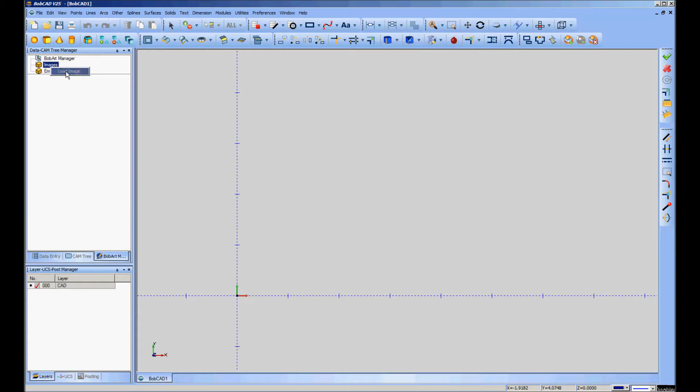Going into BobArt and just go to Images, right clicking it, and click Load Image. In this case, it is this Grayling skiff that I got off of a Google image search.

Alright, with the three view, you basically have some things in common. Drafting convention is that they will be lined up - this point of the bow is directly beneath this point of the bow. And you'll get a front and a rear view. The front is on this side, the rear is on this side. That gives you some idea of what exactly is going on.

In this case, it's a plank construction. It's made out of plywood, and it's basically plywood panels joined together at the intersections here - chines, they're called, I think, in nautical terminology. So we've got a lot of things to sort of integrate and take note of in the drawing before we really ever get to getting into CAD with this. We really have to understand this shape before we go about figuring out a way to draw it.

So let's just start with the top and work our way down. Start at the gunnel here, the top edge of the boat. One side you're in the boat, the other side you're not. You'll see that it goes from the pointy bow back here to the blunt stern.

And if we look down in the lower drawing, we'll see that its highest point is at the bow, swoops down in a gentle curve all the way to just before the transom, the very back end of the boat where you'd mount the motor, if any.

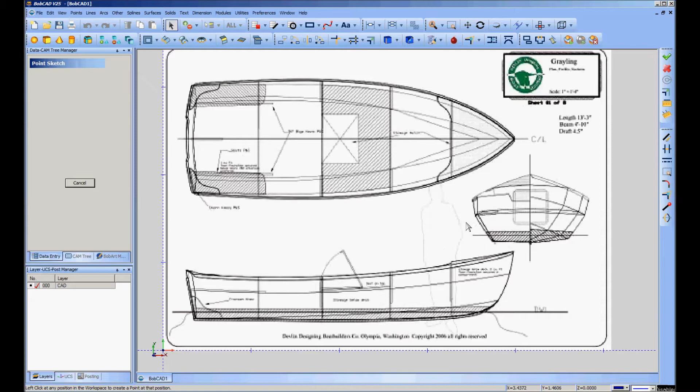So that's the salient points I can see about this boat to begin with. One of the first things I want to do is start laying out some construction lines. I want to put some points in place and draw some lines from them. So going up to Points, Sketch, I'll start with some of the obvious stuff.

I'm going to put a point right on the center line at the bow. So there's a point there, and I'm going to change my color to be more visible. We'll make it a bright green. I'm going to get rid of that point and put a green one in.

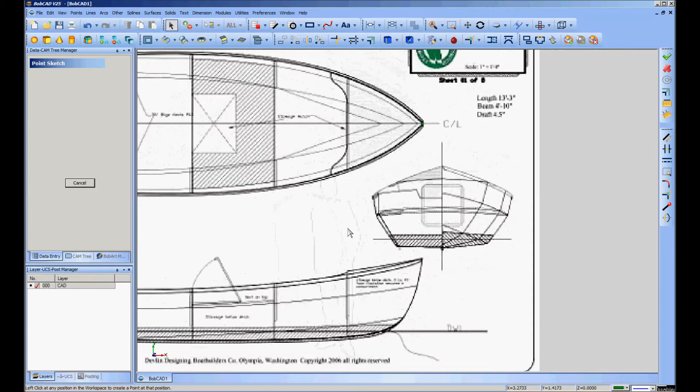That way I can see these things, because while I'm looking at the image, which is where most of the construction line business is going to be, I really need to be able to see these points and lines. So I've got one on the top view. I want to put one on the side view.

All right, going down to the first chine, there's a point. Coming down here, here's a point. Second chine, same thing. Really, those are the only points on the front of the boat I'm going to be terribly concerned with—these intersection lines.

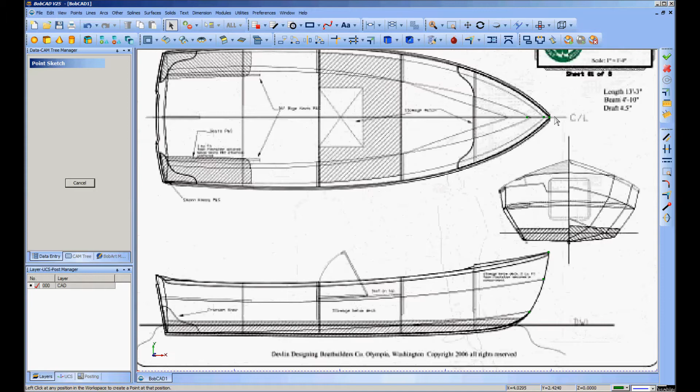When I start basically freehand drawing a spline around here for the gunnel, I want it to touch this point, and it'll intersect with the other one that I draw down here to that point.

The stern is going to be a little bit more complex. First thing I want to do is locate a point on the very aftmost part of the stern. I want one where the gunnel meets the curve of the transom.

So there's one, and I'm going to put one at the very bottom of the boat where the bottom of the transom sits. That's also really close to where this last chine meets, so we'll have to kind of differentiate that. I'm also going to put one where the first chine meets the transom. Okay.

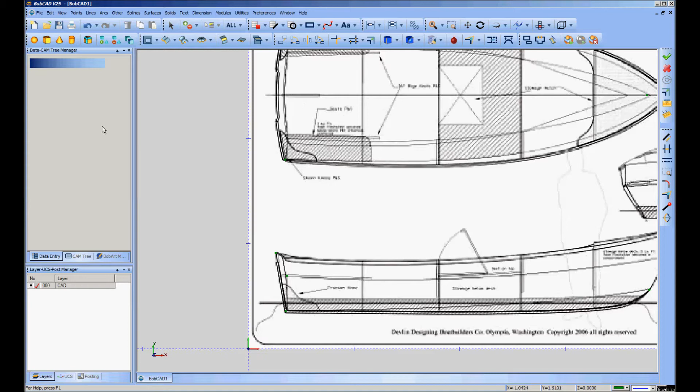Now, from there, I want to verify that this is actually vertically aligned. So I'm going to go to Lines, Sketch, and click Sketch Vertical.

Going up here to the bow—what this will allow me to do is, when I hold down Shift and click on a point... well, that doesn't actually work with just free points like that. So it's going to rely on cursor positioning, which is not as accurate, but it'll work. So I very carefully put the cursor dead center of that point, click, and I'm drawing a perfectly vertical line upward.

Now, looking at my line, it's a little bit inside the drawing down here—doesn't line up with this point. So I'm going to get rid of it, and I'll work from the top down, and move the bottom point to an appropriate place.

These really have to line up, or the method I'm going to show won't work. So there's a little bit of legwork to be done on this to allow you to go from there into projecting curves onto surfaces and extending surfaces from curves to project onto. It'll become evident pretty shortly why I've got all this construction line work in mind.

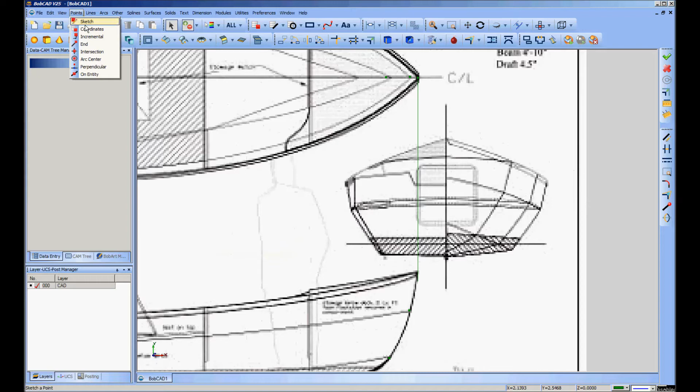Okay, so I start at the one that was farther forward at the top. Click and bring down—okay, that's still reasonable on this drawing. Cancel that, and I'm going to move that point. Actually, I'm just going to get rid of that point and put another one there, a little better located. We'll put it right there.

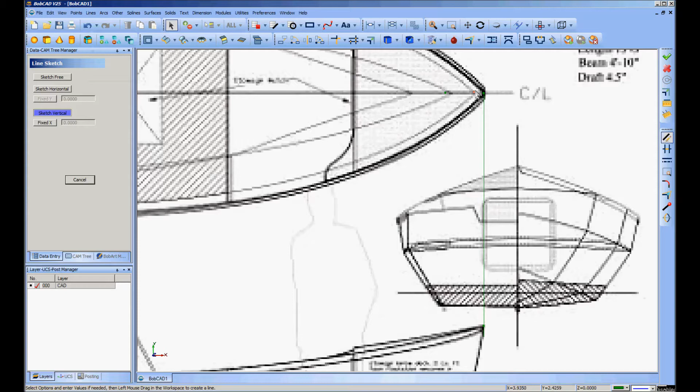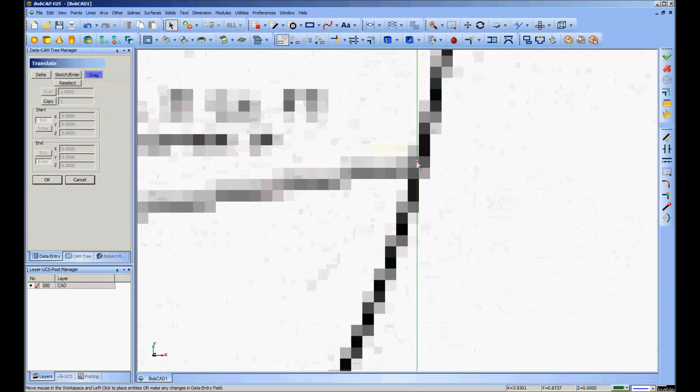Now the next one, we'll go back to Line Sketch, and it's retaining the vertical. So I'll click on this one, and as I come down, well, that's a bullseye, or close enough right there. As we really move in, we see that the point was off by a tiny little bit. Let me drag that over—that's what I was forgetting. There we go. Now that's dead on. Same with the next one.

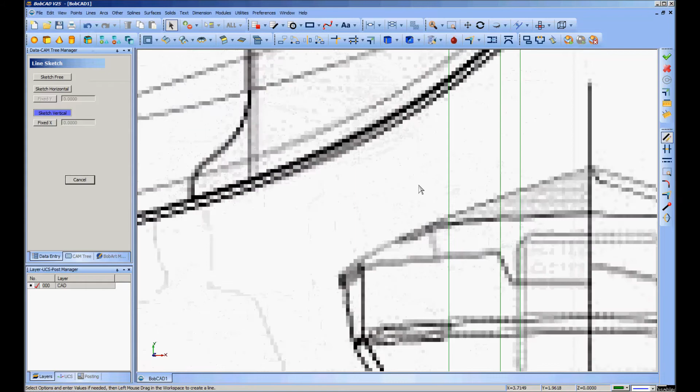One of the things I'm going to do with this tutorial is jump ahead a little bit, because once you get the idea of what I'm going to do, there's really not much need for you to see me going through the basic mechanics of setting points exactly using the basic transform drag command.

So once I've got that set, I'm going to finish doing this construction work, and I will pick up the video here momentarily. Okay, that's got all the construction lines taken care of. They're pretty much just what I had talked about earlier. I do want to show a couple of things that are probably important to know up front.

Alright, I've got two different points down here at the bottom. They're located just right together. One of them is the keel line, and the other is the bottom chine. I'm assuming that the boat is not entirely flat at the back. Basically, I needed a way to have two lines end in just about the same spot, but not be joined.

One other thing is right here, we've got a point that is the first chine below the transom. Right here, and again, when we come up, we find it right there. We have a point that is the intersection of the transom and the gunnel of the boat. And then, of course, we've got the very stern of the boat.

So all that is going to come into play when we make some new layers. We'll start with one called side curves. And I'll go ahead and make another one called top curves.

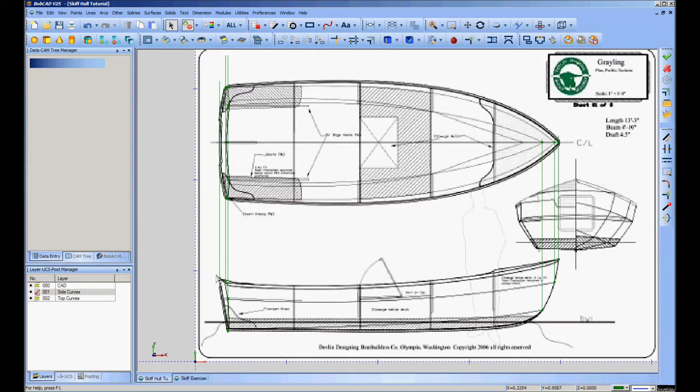What we're going to do is use fitted splines, and I'll start with the side, make that active. Take fitted splines, and I'm going to trace the entire top gunnel and transom of the boat. So I'm going to start back here, and I'm going to go right along the top edge of the boat all the way to the tip.

By the way, this feature right in the middle, it always looks like a windshield, and it always makes this boat look ginormous. But what it is, is a little hatch for storage on the seat. So just throwing that out there.

Alright, I'll just very quickly talk about what I'm going to trace, and then I'm going to start doing it. So I'm going to trace the top of the gunnel from the bow all the way back here. I'm going to trace the first chine, not going onto the transom of the boat, but starting right here at this break where the side of the boat begins, going all the way forward.

Then I'm going to trace the second chine down from its point on the front of the boat all the way back to this top point here. Then I'm going to trace the whole curve all the way along the bottom of the boat and all the way up. In every one of these cases, I'm going to extend just a little bit past these points. There's a reason for that that'll become obvious later on. Right now, I'm just letting you know that I'm going to do that.

In order to save a lot of time, I'm also going to make the top curves active, and I'm going to start tracing here. I'll do one of these just to show the idea of how to do it, but it's really boring and repetitive work, and there's no real need in a video tutorial for you to see me doing more than one or two of these.

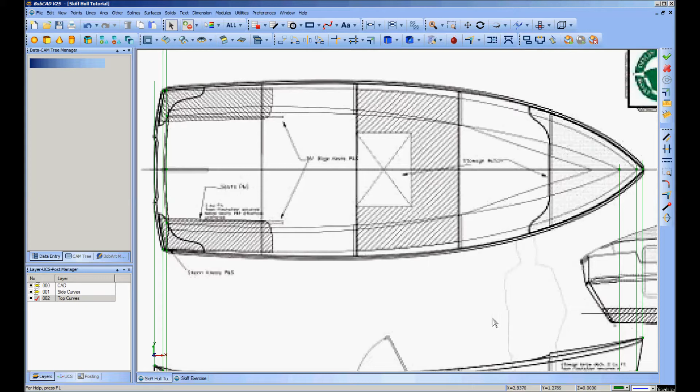What I want to do is establish intersections where the gunnel meets, where the first and the second chines meet. I want those lines to cross so that I can put an intersecting point right there, and I know precisely where those two intersect. That is also something that's going to become important later on, and it'll become obvious why I did it.

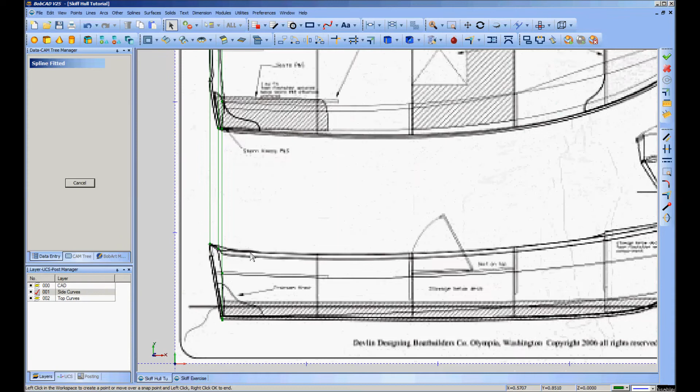So right now we'll throw a side curve on, and I'm going to use fitted splines. I'll go up to my spline tool, grab fit, and again I'm going to start just a little bit behind the actual stern of the boat. So I'm going to start there. I'm going to cross that line, curve down a little bit.

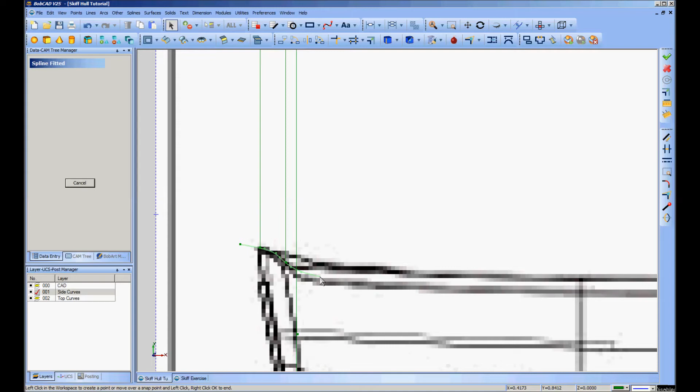Splines, the more points you give them, the more accurate the curve becomes. So when you've got a tight curve, throw lots of clicks in there. When you've got a long, gentle curve, you can really stretch it out. So I went from every couple 3 inches to, we'll throw one out a foot or two, and then 2 feet maybe.

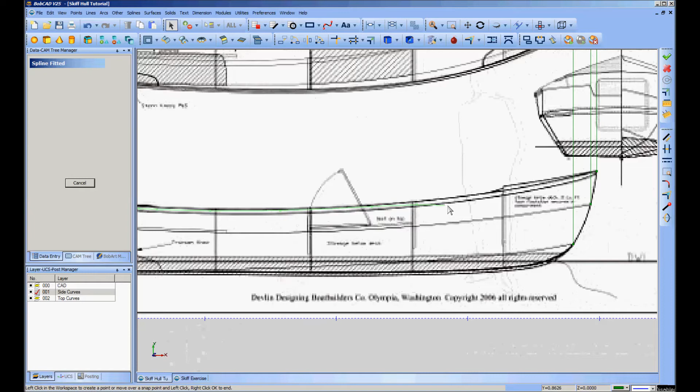And again, just match your density of points to the amount of curvature that you actually need out of the spline.

Part of this, by the way, you can see this is a very low resolution drawing. I'm imagining where this transom or gunnel will actually be. It's obvious just watching me do this process that this is not an actual construction drawing. It's a piece of advertising I found on the internet that I've decided to work from.

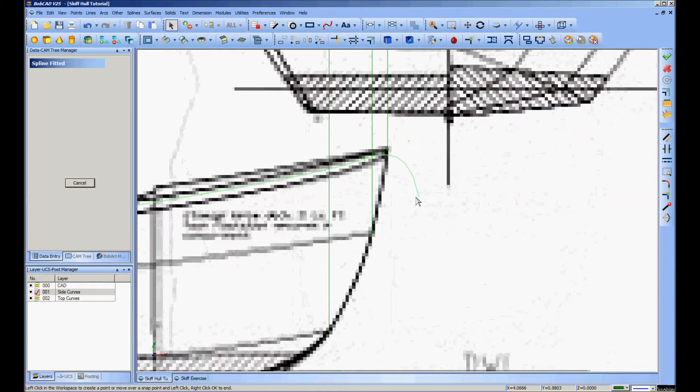When you throw your last point there, you can be anywhere you want as long as you haven't clicked yet. Then you right click, hit OK, and you'll terminate at your last point. So there's my top.

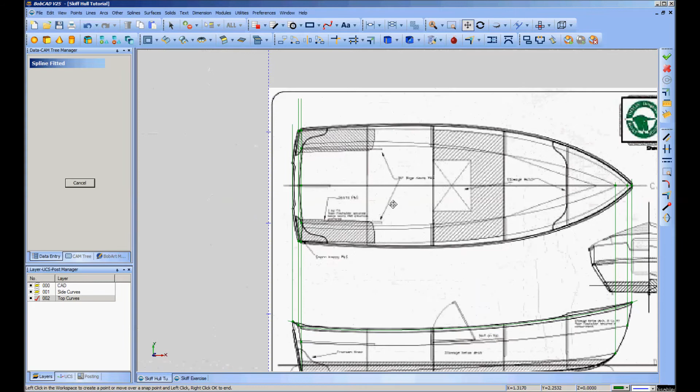I'll go quickly do a couple of intersecting ones here. I've made the top curves active. Now in this case, I want to position right on the line because I actually have a reason.

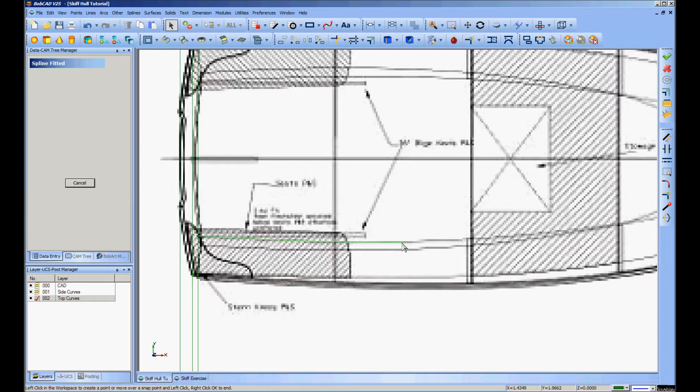I want there to be a definite stern to this boat for later purposes. It's possibly hard to see on the video just because this is a poor drawing and I'm in a gray area with a faint gray line going through it. But I'm following along, making sure that I don't get lost and wander over onto the deck of the boat here, because the line of the deck crosses the line of the chine there.

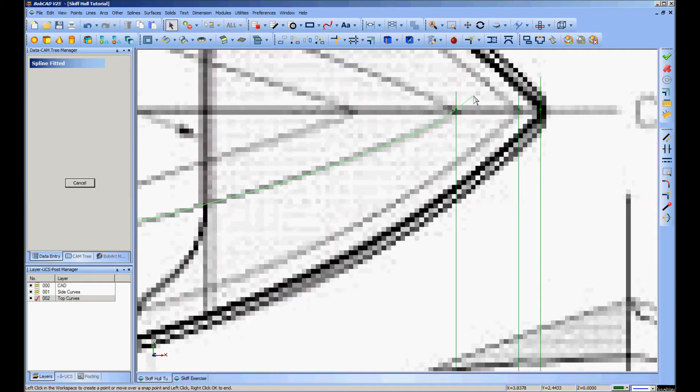Now I had a definite endpoint at the stern of the boat, but at the front of the boat, I'm just going to aim for my point there, cross it - doesn't have to be a lot, just a little bit - drop my final point, click OK, and there I have one side of that curve.

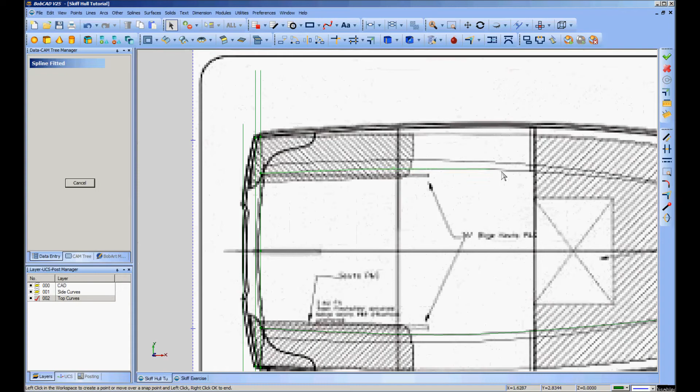And I will go ahead and do one more quickly, just throwing points along the curve. This is a very gentle curve, so I can stay with a fairly broad, even spacing and still get a spline that looks good.

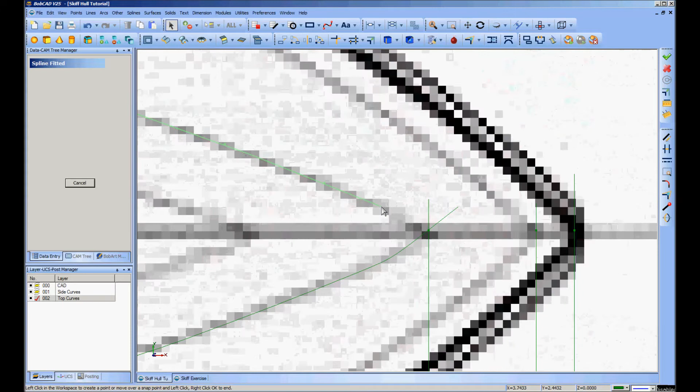Anytime you get near a termination point, anytime you need to do fussy work, zoom in. Don't cause yourself lots of frustration by trying to work at a macro level to do microscopic work. Well, it's not microscopic, but you get the point.

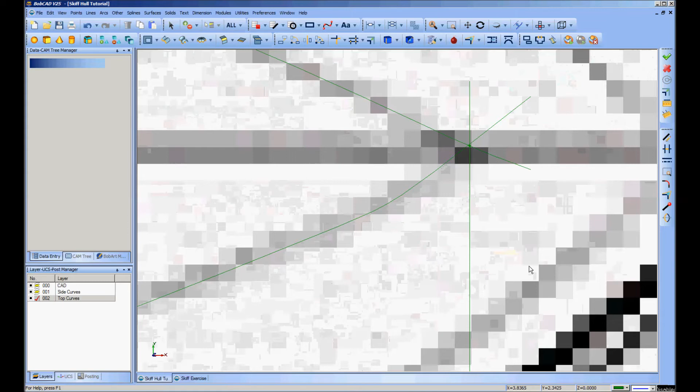All right, that's okay, that could look a little bit better. You can use deform contour on splines, but you'll wind up with bizarre 3D artifacting going on. There are ways around that, and I may get to those in a tutorial in the future. But for right now, take it as read that I've got that one.

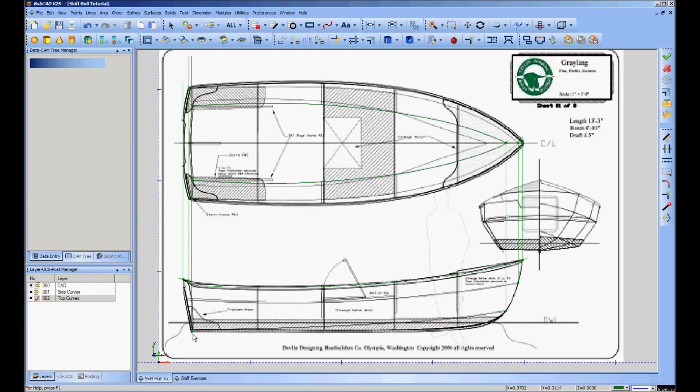I'm now going to do the first chine down from the gunnel. I'm going to do the gunnels, I'm going to do the top of the transom, which will be from the side. It's just a very short curve, but you can see looking from the top, it's a broad, gentle curve going up and around the back of the boat. On the side curves, I'll throw in a spline on this first chine and the chine that's down just above, down to below the waterline, and the keel. I'll do all those and be right back.

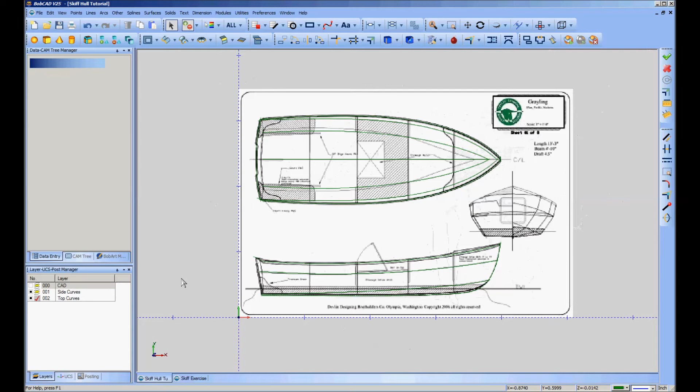Okay, now I've finished putting in the splines for the top curves and side curves. I'm done with the construction lines, so I'm going to turn that layer off. In fact, I'm done looking at the imagery because it's time to get into the CAD aspect of this. I've traced all the lines, followed all the hull contours that I can really get out of this drawing. Now I can blank the drawing using the I key, and I'm left with just straight up geometry.

One of the things that I suggest doing - right now the top curves layer is active - I would suggest anytime you get to a point, basically, as you just saw, okay, I've done all that, I've got all this work sitting here, now I'm going to go and do something with it. Well, doing something with it sometimes causes issues, so it's good to have a copy of it handy.

I've put in -10 in the x-axis here. Top curves is my active layer, so I'm going to select the top curves. I'm going to click the copy button, and then I'm going to hit OK.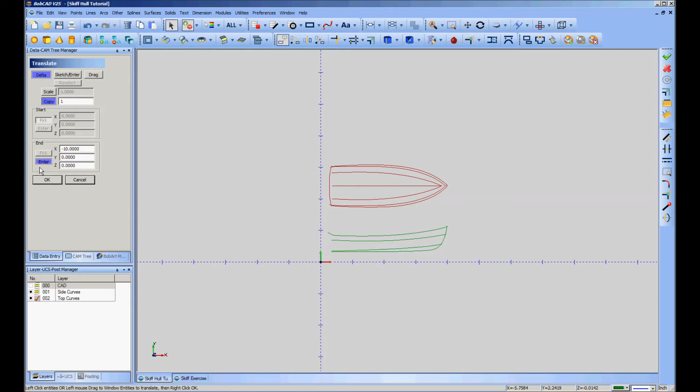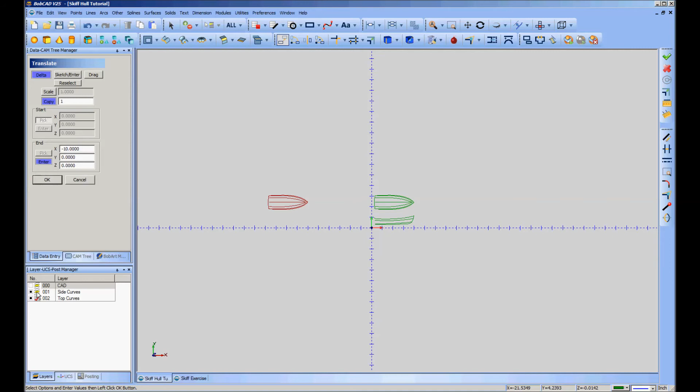If I do it right this time by selecting the top curves, right clicking and clicking OK, or hitting the spacebar works, then that'll do something when I click OK. There we go. Now, I've got a full copy of that. If I do something to it and need to undo it, I've got a fresh unmolested copy there. I'm going to set side curves to the active layer and do the exact same thing. Hit reselect to tell it I'm giving it a fresh selection. Select all of that with the drag box, hit spacebar, click OK, click OK, and there I've got all my geometry, a clean copy set off to the side.

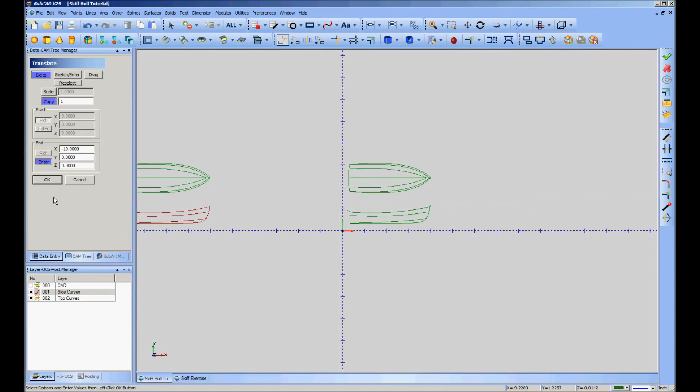Now the purpose of getting this geometry is that I need to take 2D and go into 3D. I'm going to do this by taking the side curves and extruding them into surfaces. The scale of this, you can see 1, 2, 3 inches. If I go 3 inches in the negative Z direction, that is straight down as if I were looking down on this drawing from above, I'll be able to rotate all of that directly underneath the top curves.

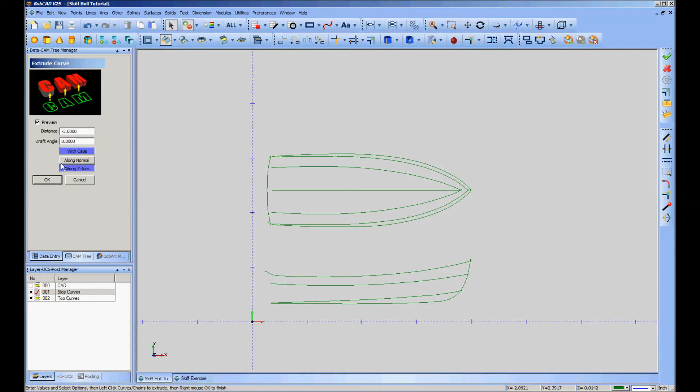I'll show you, it's a very quick process, so I'll just do it real quickly. I'll go extrude curve, give it a distance, -3, click along the Z axis. There are several options here, I'll leave caps on. Preview is set, so I'll give it a little angle so you can actually see the preview. I select a curve, hit the spacebar, click OK, and you can see that it extrudes the surface of that curve. Since preview is active, that's not the actual surface yet, so I have to hit the spacebar and click OK a second time.

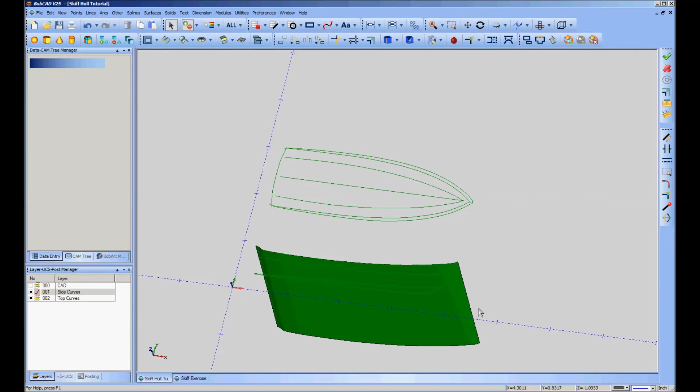Ooh boy, that much green is getting to be a little too much, I'm going to have to change that color. Might as well do it now, we'll make it a nice gray. Cancel out of that. Select and modify to current color. There we go, that's a lot more tolerable.

Alright, go back to extrude curve. I've got the gunnel and the transom curve there. I'll go to the first one. Select it, hit the spacebar, click OK. I'll get the preview, I like that. Hit the spacebar, click OK again. And repeat the process two more times.

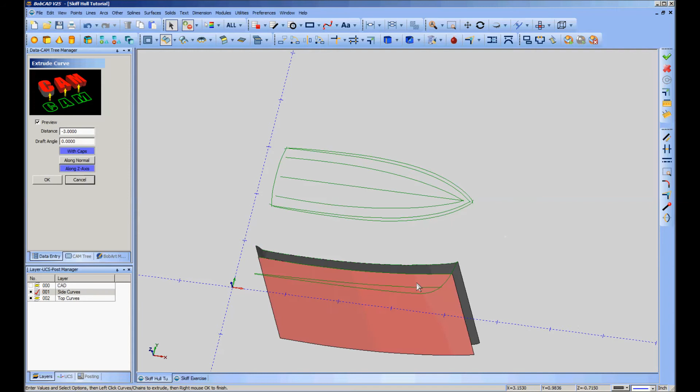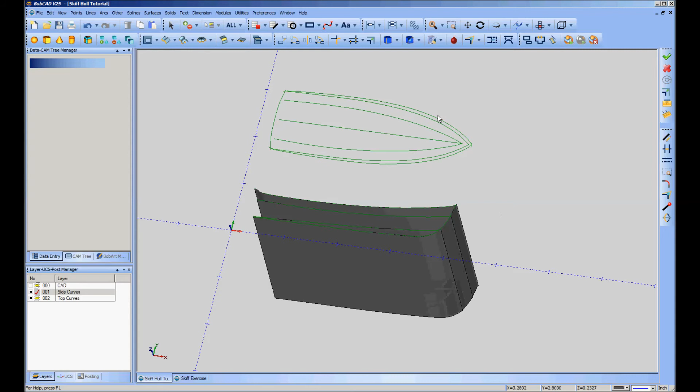So what have I accomplished here? I've got these curves and I need to rotate them under the top. I've got these surfaces and I need to rotate them underneath the top curves. One of the things I want to do is establish a rotation point. I want it at the intersection of these two lines, so simple enough. I go to point, intersection, line, line. That gives me a point there.

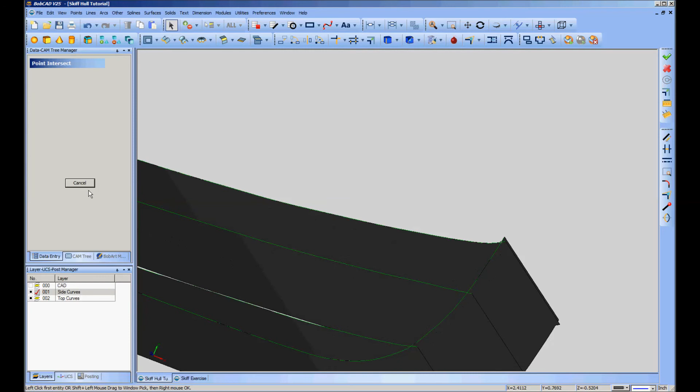Now I just want to rotate them 90 degrees. Since I picked the point that is the highest point on the boat as seen from the side, let me go back to a top view so you can look straight down on these again. I picked that rotation point as the topmost point on the boat. Right now that point is sitting on the XY plane, and this drawing is sitting on the XY plane. That being the highest point, that will be the only actual point of contact, right there. Everything else will be above the curves, and I'll be able to see it. You can be above or below curves, or below surfaces, when you project onto them, but it's helpful to be able to see what you're doing.

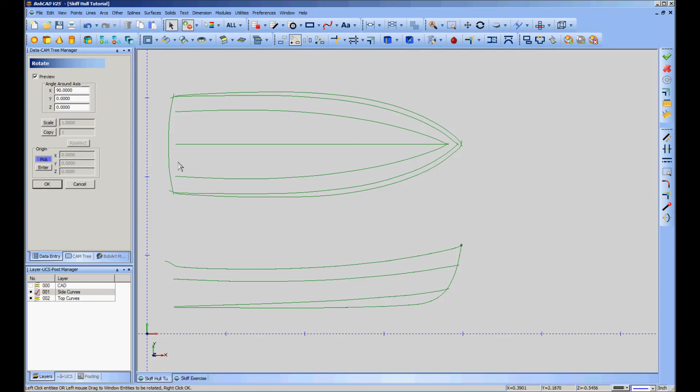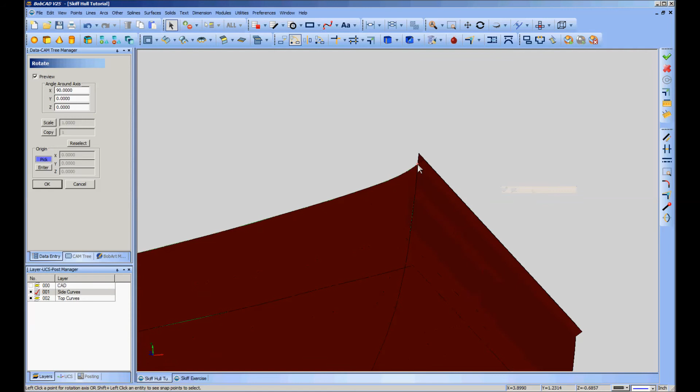Alright, so I want to go to rotate. I want to give it 90 degrees around the x-axis. Select all of those, click, make sure I've got pick for my origin, so I've got them all selected. I hit the spacebar, click OK to confirm it. Now I need to pick my rotation point. I pick that point, I back off and look to see that my preview is, in fact, putting it right where I want it. Hit the spacebar again or click OK, and there you have it. Really quick, really easy, really simple.

One thing I do want to do is put it on its own layer, so I want to make a new layer. We'll call it side surfaces.

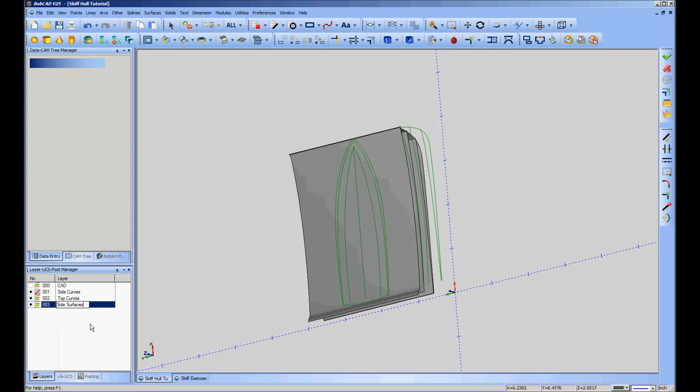I'm sorry for my typing. I never took typing in school. I have to look at the keyboard, and if anything at all is distracting me, I'm slow as Christmas.

Alright, so I select all of these guys, just do it with a drag box. Right click, go to Modify Attributes, Layer, click Side Surfaces, and select OK. Now I can turn those on and off at will.

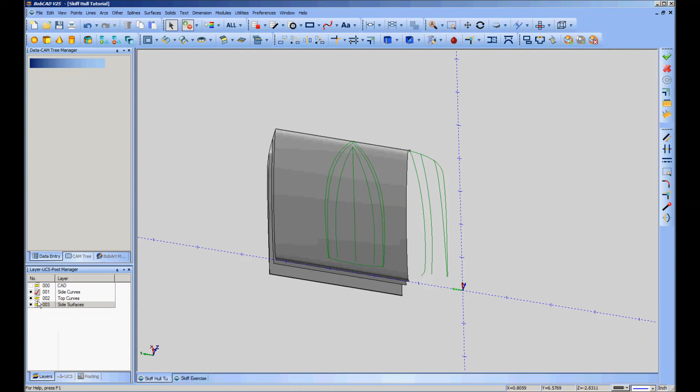And that's the last use that I should have for the side curves, so let's just go ahead and turn them off. And what we're left with is some surfaces and some curves.

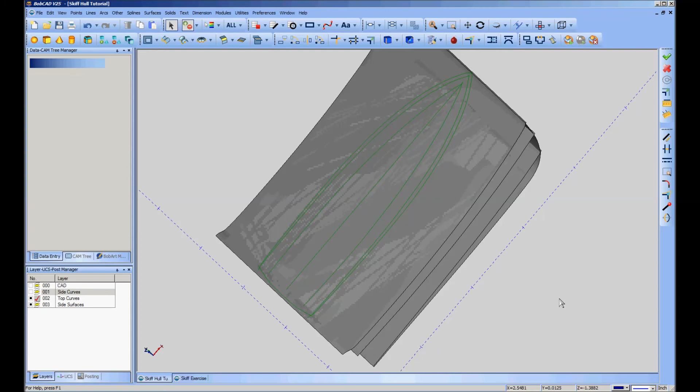And by the way, I'm going to go back to, yeah, blue will be visible. I'm changing colors around all the time just because it really helps to very quickly know where you are and what you're doing if things are different colors.

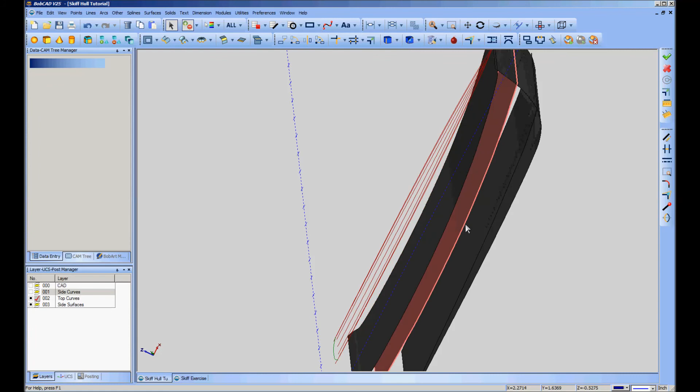Alright, so what I want to do is I want to project these curves onto these various surfaces. How do you do that? Well, believe it or not, the command is called project curves to surface.

It's under the other tab. So I'll click project curves to surface, and looking down here in the lower left, you see left click or mouse drag window over entities to project, then right click OK. What that means is pick the lines you want to go onto the surface, click OK, and then it'll ask you to pick the surface.

First thing I want to do, and I think I'm going to have to redo this - when I was practicing it, for some reason this particular one needed a little bit of loving care - but I'm going to take the lines that form the gunnel and the transom, and I've got them crossed over here. I think I may have to come back, trim those down to make it actually 3 chains connected, and do it that way. But we'll try it this way first and see.

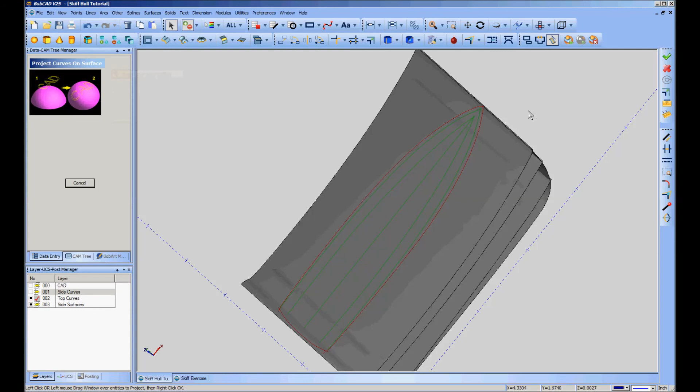So I've got them selected. I click OK. You notice that the prompt down here says left click over solid or surface to project onto. Well, I want the very top most one, so click on it, and you notice suddenly I've got blue lines there. Well, that's nice.

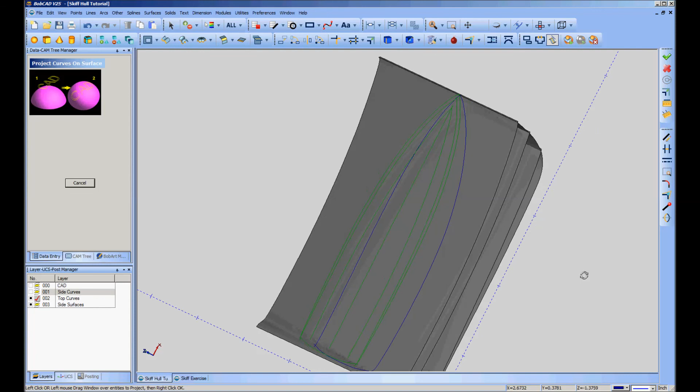So now we just go down through the layers of the onion here. I'll go to a top view to make it easier for me to see these guys. Next I want the first chine down. Select those two, click OK, rotate up until I can select that one surface.

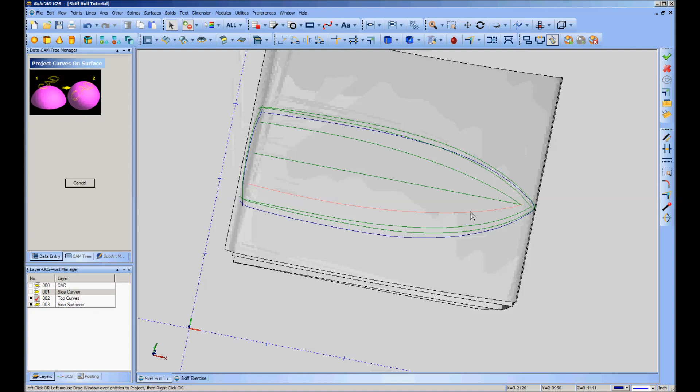I don't even really have to see it to know it's there. In a moment I'll get rid of those and you'll see all of these lines in 3D. Now I'm down to the bottom chine, 1, 2, click OK, pick that surface, and last we're at the keel.

Hi cat, how you doing? Cat wants me to play.

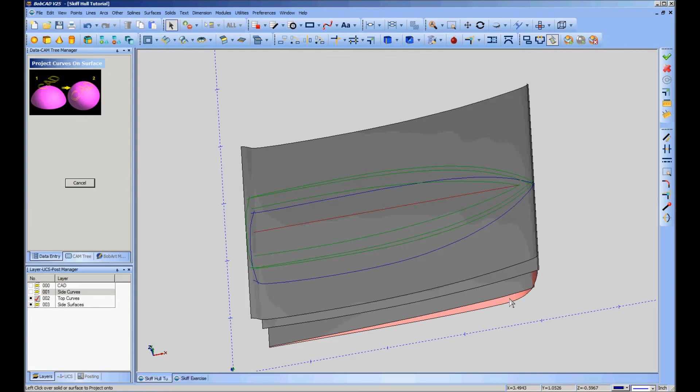Click OK and select bottom surface there. Alright, that's got those done. I'm going to make a new layer.

Label it 3D curves. I'm going to go into select mode. I'm going to go up here and I'm going to say pick by color. I'm going to pick blue. Hit OK. You notice just the projected curves are lit up now. And I'm going to tell it to add to the layer 3D curves.

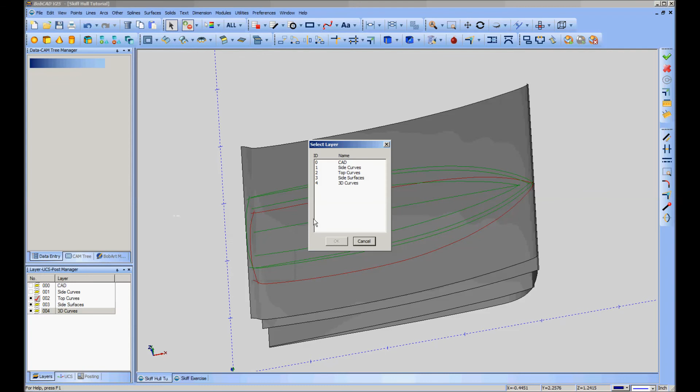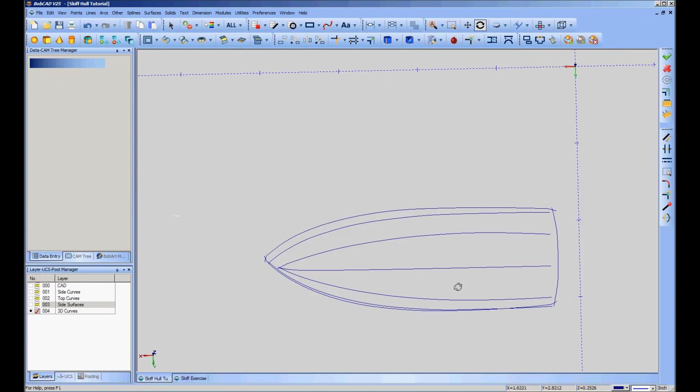Now I can get rid of everything but my 3D curves. Now you'll notice this suddenly is looking like the lines of a real boat hull. There's still a few things left to do, but we're getting really close.

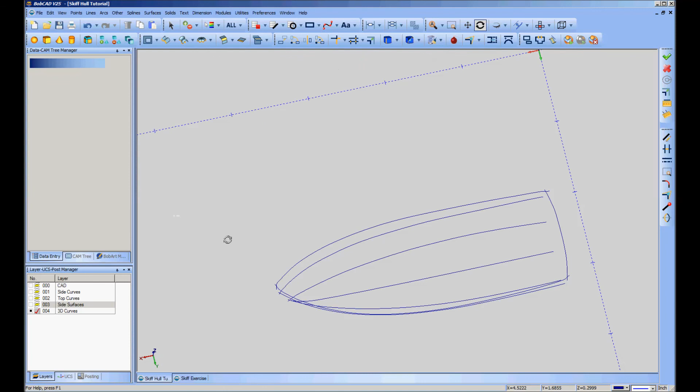I'm going to go ahead and end this first part of the tutorial now, and I'll pick up the next part where we'll skin this wireframe. We'll make a solid out of it, and then we'll discuss some of the possible ways or theoretical ways that we could make a more accurate model than what I'm going to show you.

That - it's a case where theory ran up into practice and took a fearful ass whooping. I've not been able to figure out how to make this look like a plank construction. But again, we'll get into that in the second part of the tutorial, and I hope you've enjoyed what we've got so far, and hopefully you'll have more to see in the next one.